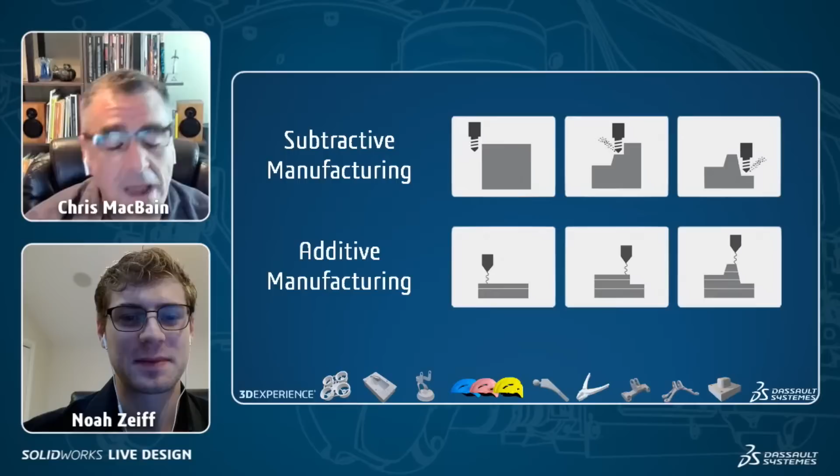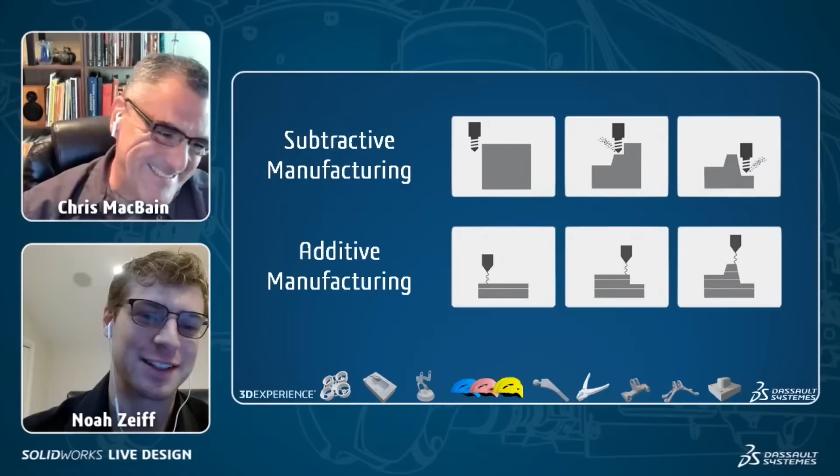I think one of the reasons, Noah, and you'll agree, we're both really excited to do this is because this topic is so fresh right now and so new that getting this out in the open and starting this conversation is really important, that it's not subtractive or additive, that they really do work together. Right. So for anyone in the chat, sorry, we put the boxing gloves away. This is not a one versus the other. This is very much working together. But awesome. Thanks for painting that picture for us, Chris.

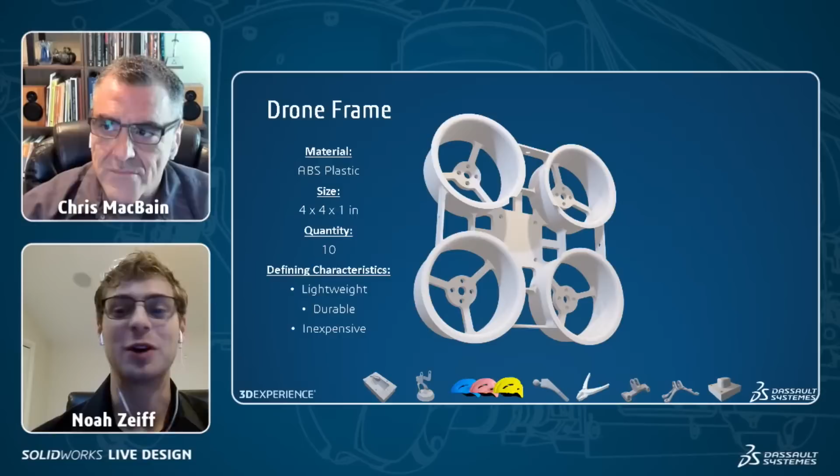So let's jump in. We have our first part, and this is our drone frame. It's made out of ABS plastic, 4 inches by 4 inches length and width, only an inch tall. Customer wants 10 of them, and the defining characteristics are lightweight, durability, and it needs to be inexpensive. So before we jump into it, I just want to preface all the parts we go through today. You can subtractive manufacture the ones we would recommend using additive for, and vice versa. You could injection mold these. You could whittle them with a stick, as one of our producers pointed out. But this is just our recommendations for this specific criteria and the additive and subtractive requirements.

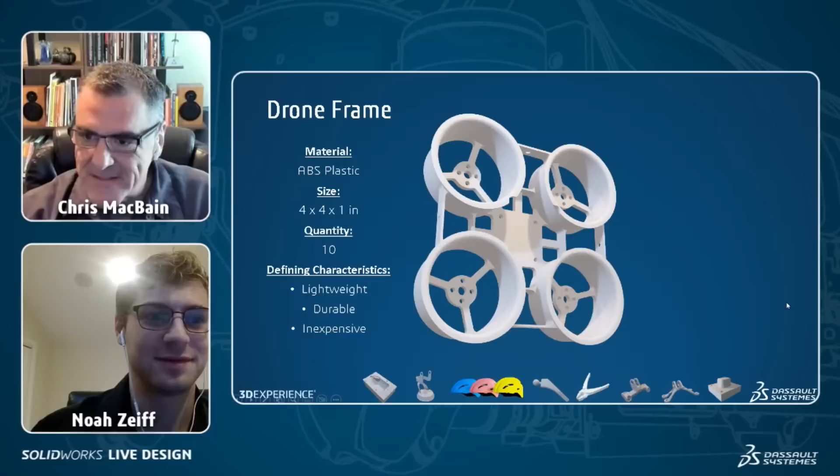So this is a really interesting model also, Noah. Yeah. It looks really simple, but when you look at it a little bit closer, it becomes a lot more complex, and I'm looking forward to seeing how many people go which way on how they make this. Absolutely. And for this one, we're going to go with additive. And there's a couple reasons why you would go additive with this part. Going down the line, when it comes to the material size and quantity, you could go either way. They could be subtractive characteristics.

But if you're looking to reduce weight, additive gives you the unique opportunity to get those hollow infills. And this quality, CNC machines, subtractive manufacturing machines, can't replicate because there's no hole for the drill head to enter an enclosed surface. But beyond that, not only can you make hollow infill, but you could actually control the infill based on your specific needs. So you can make a part completely hollow to reduce as much weight as possible, or you can create specific infill patterns related to, let's say, strength.

So there's also many softwares now that can let you do a gradient infill to change how dense different parts of a component are. So let's say the cylindrical parts of this drone that protect the propeller, let's say they take a beating more so than other parts.

So you can manufacture this with additive manufacturing. So those cylinders have 100% infill, super dense, super strong, and the rest, like these bars or the middle part holding the PCB board, for example, is only maybe 5 or 10% infill. So you're saving weight, and essentially you're saving material and money as well.

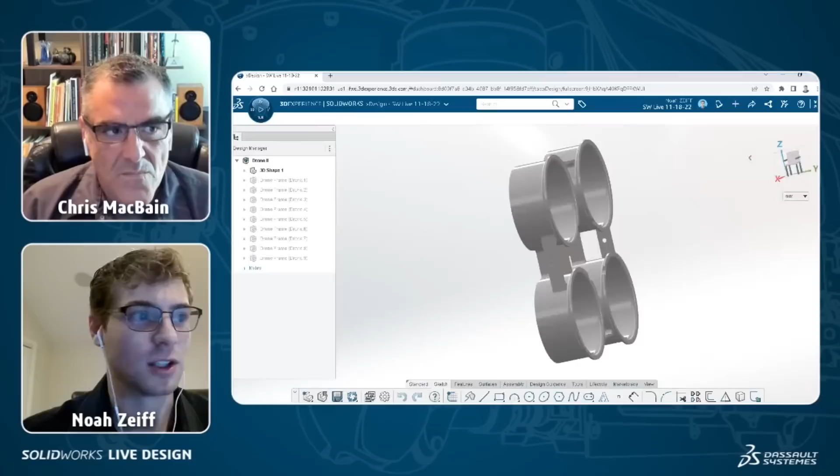And finally, for economic purposes, cost-saving production, additive is a great choice here because if we hop into XDesign quick, I could get our drone up, we could see how if we were to subtractive manufacture this, a traditional CNC machine, and Chris, feel free to chime in, it would only be able to cut down from the top. So this is only the geometry we would have access to if we're cutting.

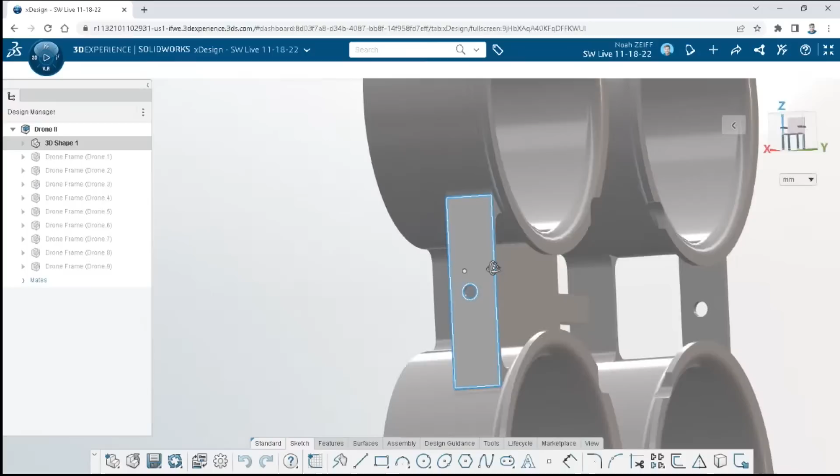But if we look from the side, there's a bunch of geometry here, like the underneath of this bar and this little crevice here that we wouldn't be able to get to if we were cutting straight from the top angle. So this is a great example of how if you were to CNC this, you would either have to use a multi-axis CNC or you'd have to take this part out, flip it over to get the other side. So for those reasons, and let me know if I left anything out there, Chris.

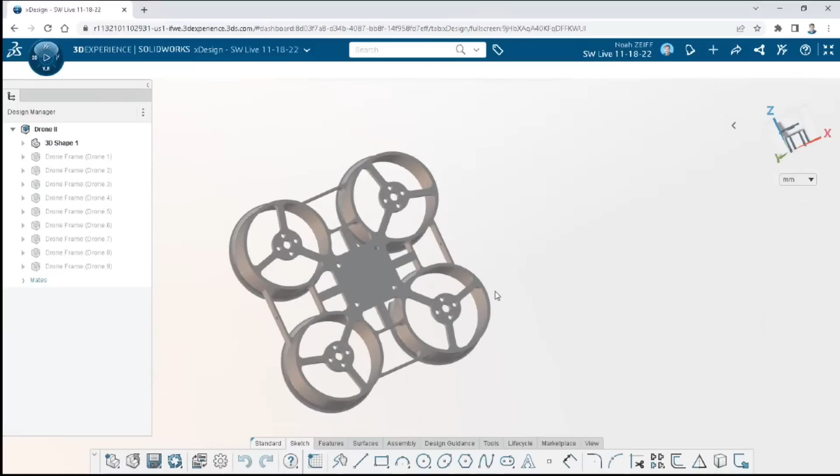Yeah, no, for sure. So I was looking in the chat and somebody was talking about injection molding and things like that. And yeah, you could definitely injection mold this. The amount of slides would be ridiculous, right? Because we had slides on all 4 sides and in the middle. Yeah, for sure. There's undercuts on this part that make it pretty impossible to just subtractive, to make these on a table out of plastic or aluminum or whatever, because of those undercuts.

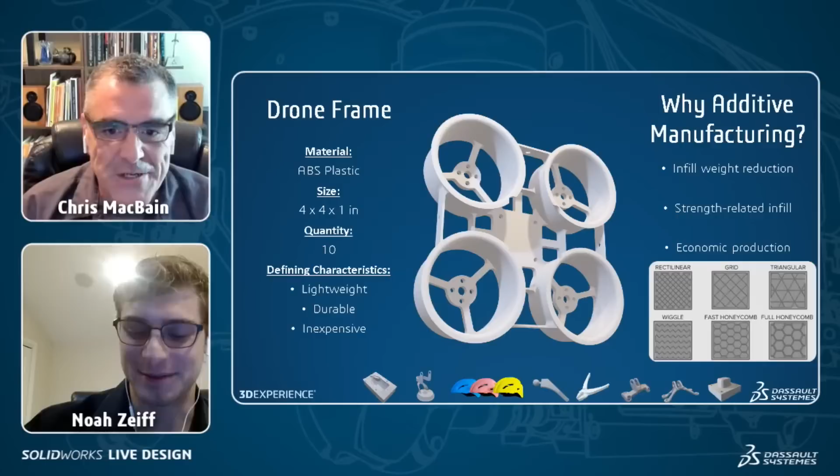I mean, of course, I shouldn't say impossible, right? Anything's possible. I think we've all in the shop made things that people thought were impossible, but this is a great example of additive, Noah, for sure. Thanks. So, yeah, so those are the reasons why we would do additive for this one. On to our next one, though, our blow molds.

Yeah. So this is a tool steel material, pretty large part, 16 by 10 by 6 inches. Customer only wants one of them. And defining characteristics are a smooth mold surface and wear resistance. So let us know in the chat, what are you thinking for this, additive or subtractive? Yeah, just throw it in the chat really quick and we'll see.

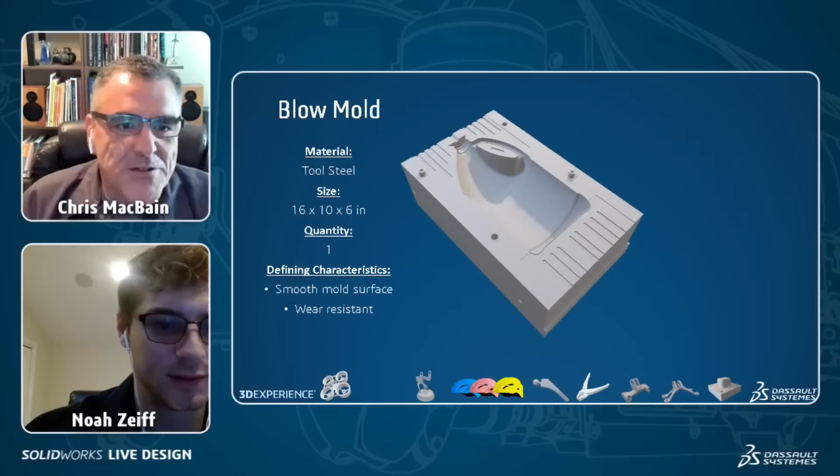But these blow molds are great. This is actually, this kind of mold is something that I used to use for demos, CAD and CAM demos, like way back in the day. And everybody was all impressed with the bottle mold and the blow mold. It was really fun to bring it back and talk about 3D printing it or machining it.

It was great. Awesome. So let's go ahead and reveal the answer here. You got it. It is subtractive. Chris, can you tell us about this one? Yeah, so this one might seem obvious because it's like a big block, right? But more and more, as Noah was saying, with the inside structure and the fill options for 3D printing, you could definitely do a mold core out of this.

Now, for this one, just because of the size, you're looking at 16 by 10 by 6. That would really stretch the build volume of a metal 3D printer. Yeah. And that being said, doing this in 2 parts would probably be disastrous. Also, there's another big thing, surface finish. You're probably going to have to machine the cavity of this to get that shiny surface finish. If you did print this, you'd have to do it post.

Although we only need one of these, which would really kind of lend itself to 3D printing. Because of the use, because of the forces on this, definitely subtractive for sure. Awesome. Yeah, and thanks to those in the chat who said subtractive. Kudos to you.

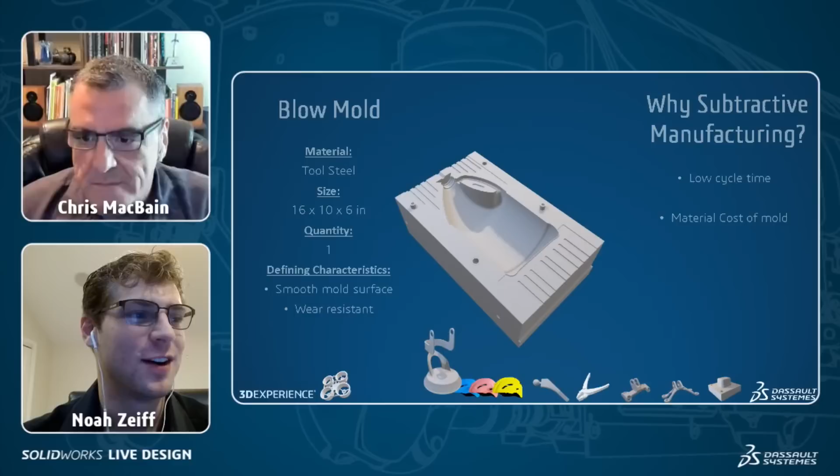Our next part, we got a microphone stand. Chris, can you tell us about this one? Yeah, so this is great. This is actually my microphone stand that I'm using right now. It's actually kind of a mix of stainless steel and tool steel on the back. The customer called, they said they want 500 of these. It's a prototype run, right? So here's the big things, right?

It has to have a heavy base because it needs to hold it, and it needs to be sturdy but lightweight, right? That bracket. So what do you guys think? So it's got to be heavy, right? It's got to be sturdy, and we need 500 of them. Yeah, and this is a good one. I think you can definitely additively manufacture this. You can definitely subtractively manufacture this. Yeah. It could go either way. So the defining characteristics here really play a part in which way we would recommend.

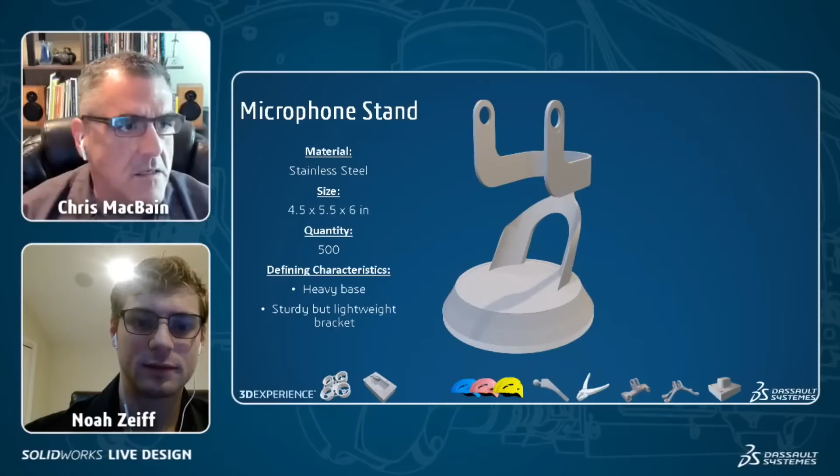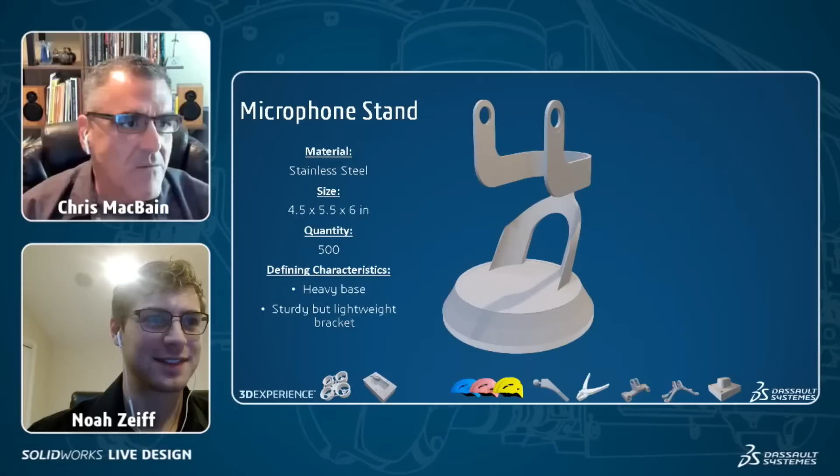Right. So one of the things we talk about is subtractive versus additive. But I think in the subtractive realm, we could also talk about castings. Yeah. Right, because at some point we have to machine that cast. Although there you go, Noah. There's another great live episode using 3D printing for castings. But for right now, just talking about this one, casting at least the top part and attaching the bottom might be a good way to do it. Let's reveal how we do it. There we go. And this is a subtractive one.

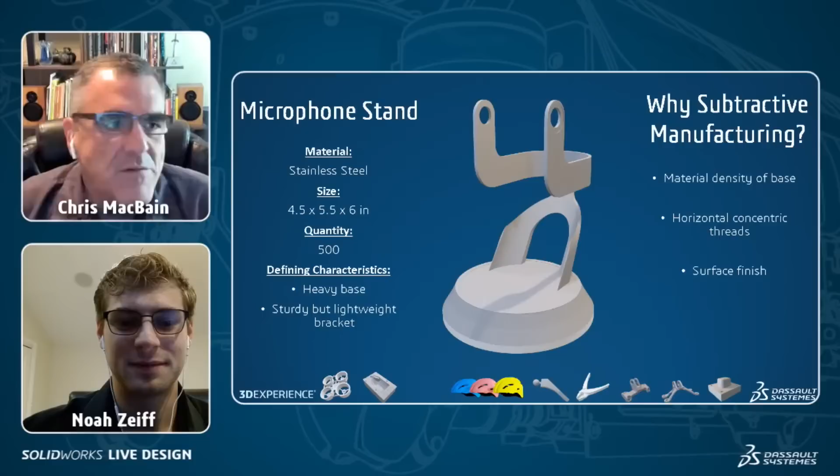So the big thing here, guys and ladies, is the heavy base, right? That's the problem. So if we could add stuff to the base, but we're talking 500 of them. So if we were to print them hollow and fill them, say, with lead shot or sand or something, first of all, what a mess. Second of all, it's expensive, right? You're talking about materials to put in there, people that do it, things like that. When you add all of that for a 3D print, it really makes sense to make these individually using subtractive. Without a doubt.

And again, the brace, now that I look at that, would probably be cast and then attached for sure. Yeah. And even if you printed that heavy base with 100% infill at the bottom, I don't think it would be heavy enough to handle a Yeti microphone or something of that nature. So definitely subtractive for this one. Yeah, for sure. All right, let's move on to our next one.

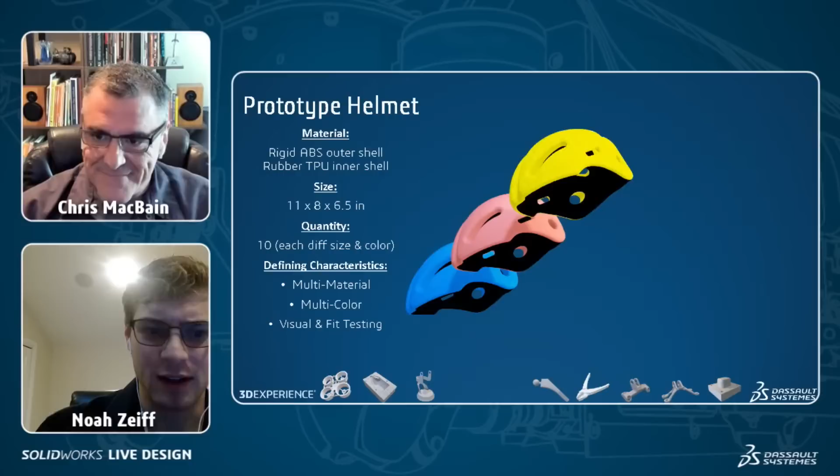We have our prototype helmet. This is a multi-material part. It's got a rigid ABS outer shell with a rubber TPU inner shell. It's around 11 by 8 by 6.5 inches. The quantity is 10, but the customer wants different sizes and colors. And defining characteristics are multi-material, multicolor, and they want to use this for visual and fit testing. So let us know quickly in the chat if you're thinking additive or subtractive. And we'll reveal the answer here in a sec. Drum roll, please.

We got additive manufacturing. And this is an important one because it points out a really important defining characteristic that makes additive different from subtractive. In subtractive manufacturing, you have your block of material that you're cutting away from, and it's usually a singular color or material. Whereas in additive, you have the ability to deposit colors and materials in specific areas. So this is commonly used to differentiate support material from model material, where you could break away supports for overhanging angles. But you could also use this to differentiate different parts of the same model, where we can print a flexible inner shell and a rigid outer shell.

Some additive technologies even take this further, and instead of just using separate nozzles to deposit separate materials, they can mix those materials and colors as well. So you could get qualities of both materials in one. So this can be done to mix yellow and blue to create green, as you see in this example, but you could also mix flexible and rigid materials to get a material with different degrees of hardness, which is something really interesting that's being researched now.

And finally, this capability would be great for this case economically, because if the customer is interested in running several tests for visual fit testing, they need to make a lot of iterations. It's likely they're going to need variations, different colors, different sizes. And with subtractive, you'd have to buy each of those materials and colors to cut your part, whereas in additive, you can mix those base colors and materials until you find a winning combination and a winning prototype. So you could stick with the materials you have and mix and match them till you get what you want, as opposed to buying exactly what you need. Yeah, you're absolutely right. Those points you brought up are great, especially when we talk about iterative design cycles.

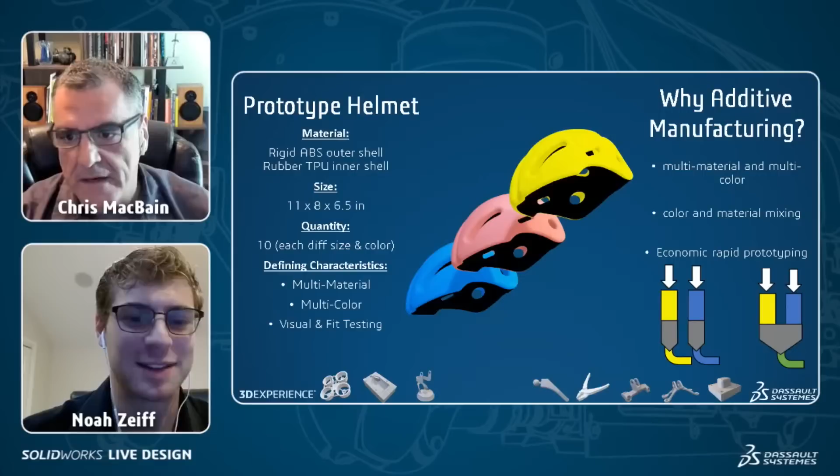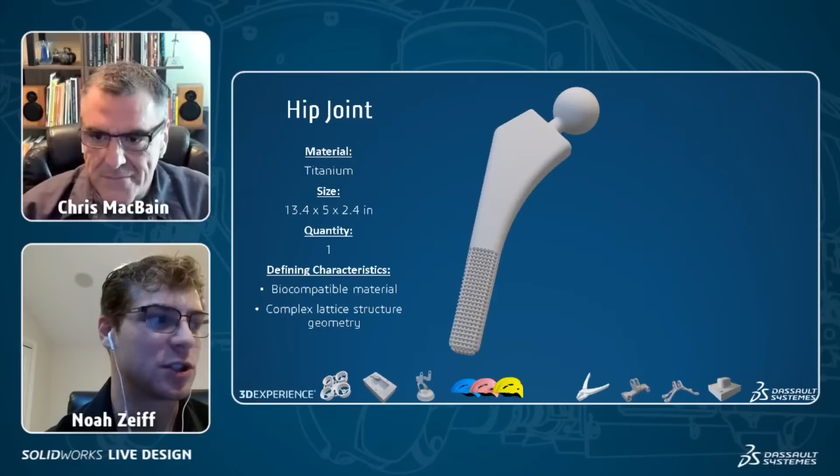So this is an interesting one. This is a hip joint. Material is titanium. Size is over a foot in length, 5 inches wide, 2.5 inches thick. The customer only wants one of them, and defining characteristics are biocompatible material and a complex lattice structure geometry. So quickly let us know in the chat, additive or subtractive, and we'll reveal the answer in a second.

I have to say, this is my favorite one, Chris. Yeah, this one's pretty awesome. This is a really interesting one. Yeah. So, this one's interesting. Everybody, when Noah and I were getting ready for this, believe it or not, we practice, right? This isn't just the first time we've done this, but we were talking about how these used to be made. Yeah. And it's crazy. Noah's going to explain it, and then we'll go in a little bit about why additive is above and beyond the reason for this. So yeah, go for it.

Yeah, like you said, this is a really interesting one because traditionally, this is additive, by the way, and it's because of really that lattice structure. But typically, these hip replacements were made with subtractive manufacturing. And what it really comes down to, why this is now becoming an additively manufactured part, is that lattice structure, where you have this complex overlapping geometry that drill heads or milling heads just can't get into.

And to give you a stat, traditionally manufactured hip replacements are still widely used, still created and used today, but a study did show that 20% had to be replaced within 25 years of those traditionally made hips. So additive manufacturing is really there to decrease those chances of having to replace or redo a serious surgery like a hip replacement. Yeah, and this is all because, I'm sorry, go ahead. Because that lattice structure, the bone is actually able to go in and grow into that and through that. Sorry to interrupt, it's just a really cool model. That's one of the reasons they need to be replaced.

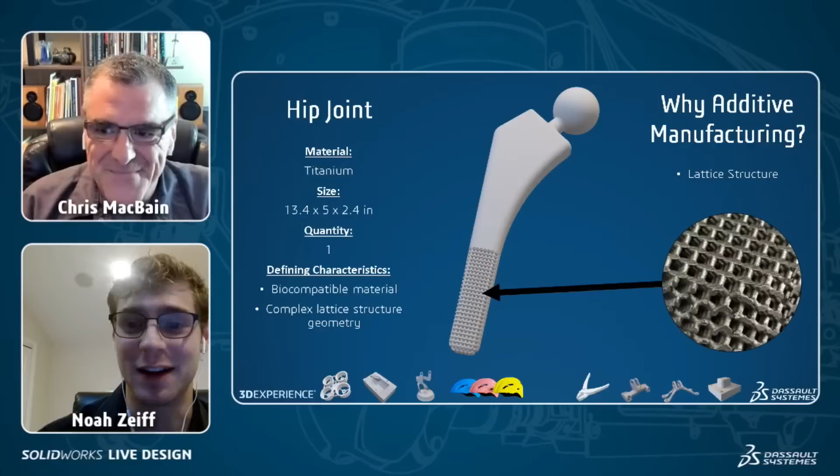Yeah, you beat me to the punch. Sorry. No, you're perfect. Osseointegration is what I was going to say. That connection between the bone and the artificial implant. That lattice structure allows for a better bond between those two. So when you put this in, the bone will literally grow around this implant, and it's not going anywhere. But exactly like you said, definitely something exciting where additive is being used in the medical community.

All right, next up we have this hand pliers tool. The material is nylon. Size is 4.5 by 5 by 3/4 inches. Customer wants 200 of them, and defining characteristics are quick turnaround, so fast production, and they need to be durable. So let us know quickly in the chat, what are you thinking, subtractive or additive for this one? And we'll go ahead and...

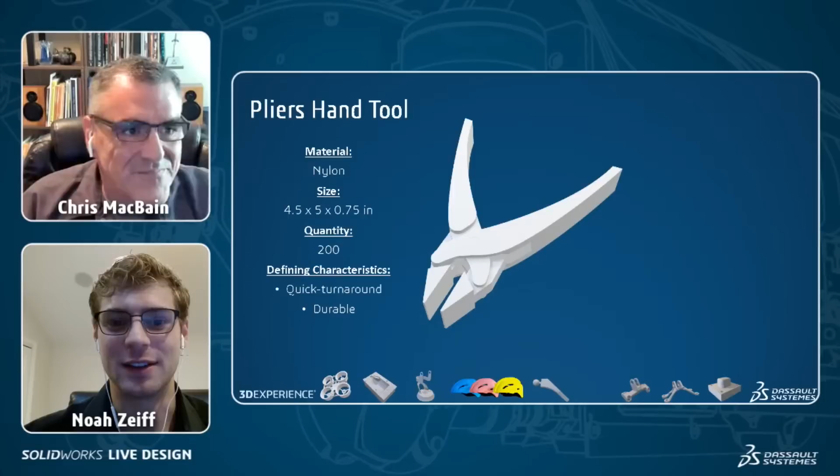Yeah, this one was fun. So this one Noah brought in to the presentation, and the first time I saw it, I thought, okay, that's unfair. It's going to be printing. But the more I thought of it, I was like, I could totally machine that, man. It's only like, what, 1, 2, 3, 4 parts. Yeah. But there's something about it we'll talk about afterwards that I actually thought about last night. Not to throw a curveball at you, but go for it. No, in fact, we'll even make it a little bit easier on the audience. We'll bring up the 3D model in XDesign so they have a good idea of this part, how it moves, and we'll even give them a section view.

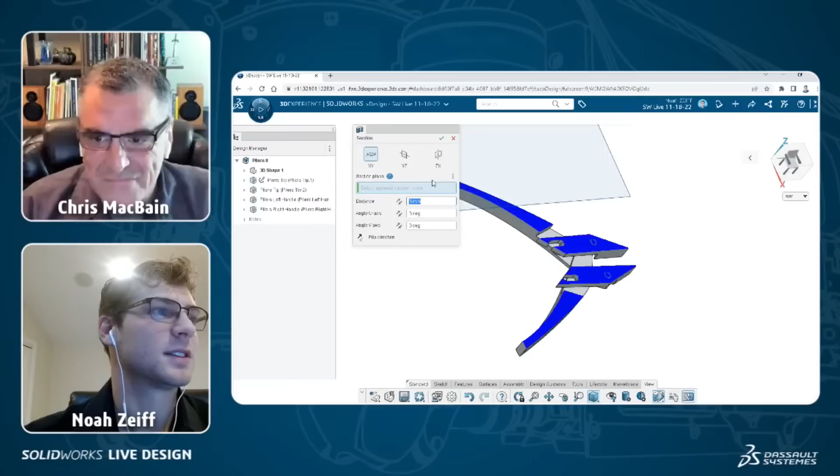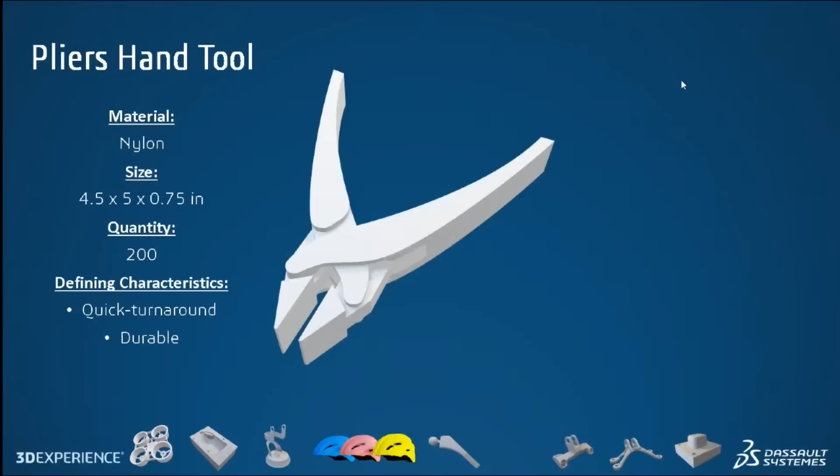Let's see here. So we could go through our part quickly so you can see how the internals work and such. So, jump back to our presentation. Having seen that, we're going to go with additive.

So why is this additive? The main reason is movable assemblies. If we're looking to do a quick turnaround time, fast production, we don't want to have to assemble these pliers together. And Chris is 100% right. You can absolutely subtractively create these parts. Thing is, you're going to have to assemble those parts together once you finish making them. Whereas in additive, you can print support between these parts, and when this part comes out of the bed, you can just blow away that support material, and your part is then free to move.

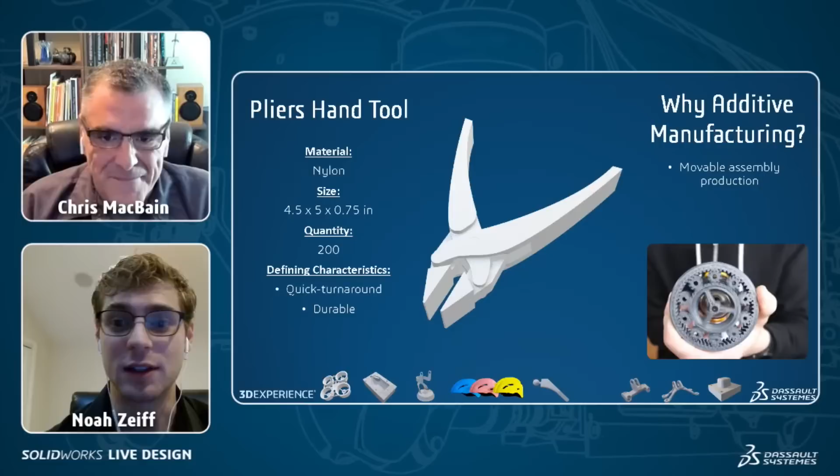Another reason why we would go with additive, especially when you have this moving assembly, is multi-part production. Now, this is a strength that can go with additive or subtractive, producing many parts in a quick time frame. But if you're going with additive, you get to exercise a unique capability, which is Z-stacking, or we call it nesting. Basically, if you're using a powder technology, like in this video here, we're using SLS, or you're using binder jetting, the parts as you make them are suspended in this volume of powder. So they could literally sit on top of each other, and when you remove them, you don't have to worry about compromising any of the parts below them or above them.

So unlike material extrusion, which you may be familiar with, it's like the most popular desktop form of additive manufacturing. In that case, you can only use the entire build volume in the X and Y. It's not advised to print support that you have to break away and then print another model and break away support on top of that, because you're going to get some poor surface finishes on the bottom of your parts. Here, you don't have to worry about breaking away material. You could fill the entire build volume in the X, Y, and Z. Yeah, that's basically absolutely right.

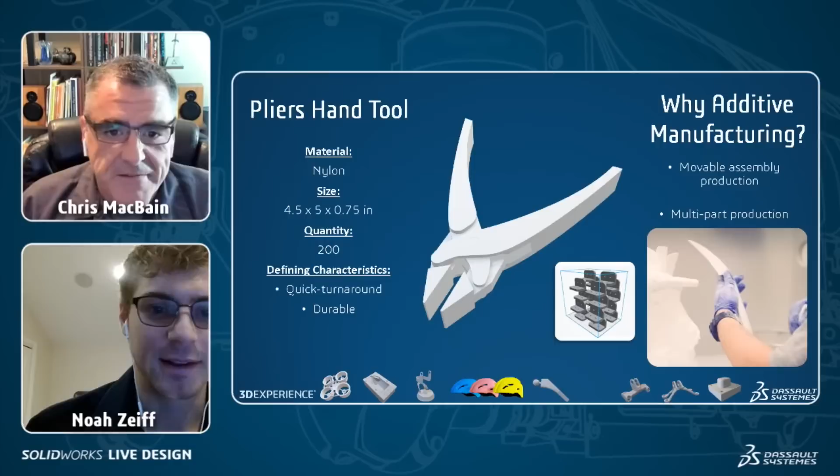You know, I think manufacturing-wise, if I was to break this into those 4 pieces, honestly, the production time, because it's a 2D or 2-axis machine, I may be able to get close to the production time, but it's the assembly that adds to it, right? Because I'd still have to put either pins, drive pins, whatever kind of assembly I end up doing on this. Whereas 3D printing, it's not just the cost of making it or what's easier to make. It's the post processing. What do I need to do to this part afterwards? Does it make sense?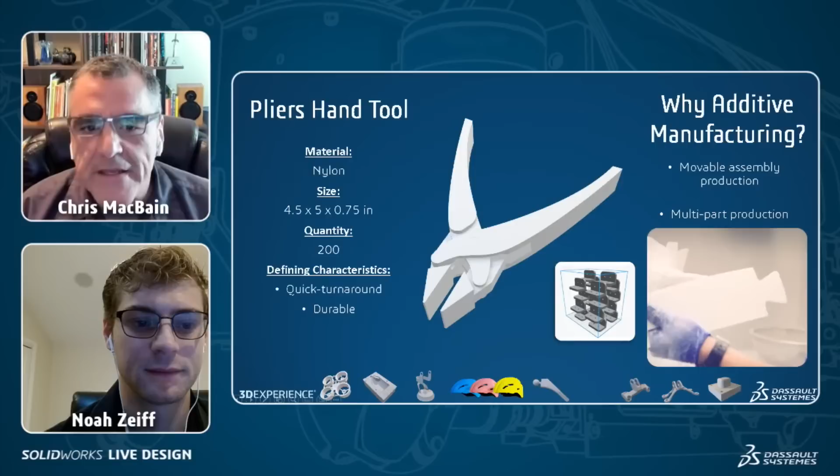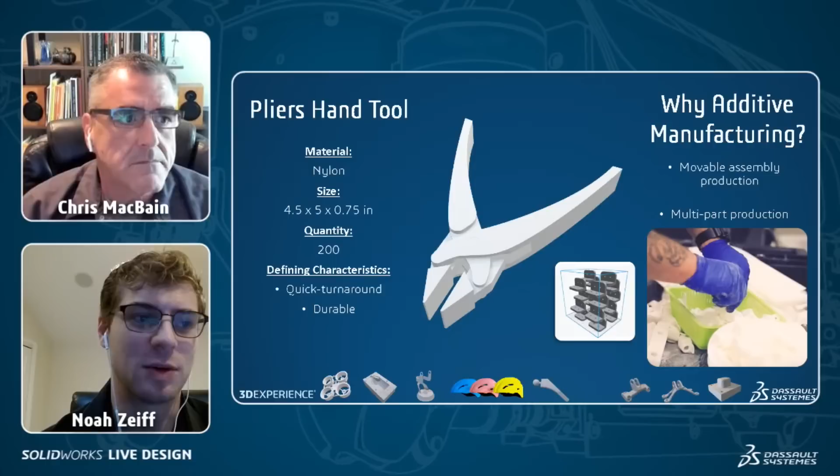And this is a really great example. Again, we're killing it with ideas for new lives, but this is a great example of design for print or design for subtractive, right? So when you get the design for intent, it really starts to get important and really starts to show your time savings and cost savings for sure. Absolutely. Yeah, that's a great point. I definitely have that one on my list. Designed for additive or designed for subtractive. Changing your model so it's easier to produce is a topic we could talk about forever. Forever. Yeah.

But next up, we have this bracket. So this is a bracket made out of aluminum. It may look familiar to some of you in the chat. We'll see. Its size is 6.8 by 4 by 2.5 inches. Customer wants 400 of them, and defining characteristics are lightweight and durable. So let us know. It's starting to get tougher, guys. Subtractive. It is. That's right. It's starting to get tougher. What do you think?

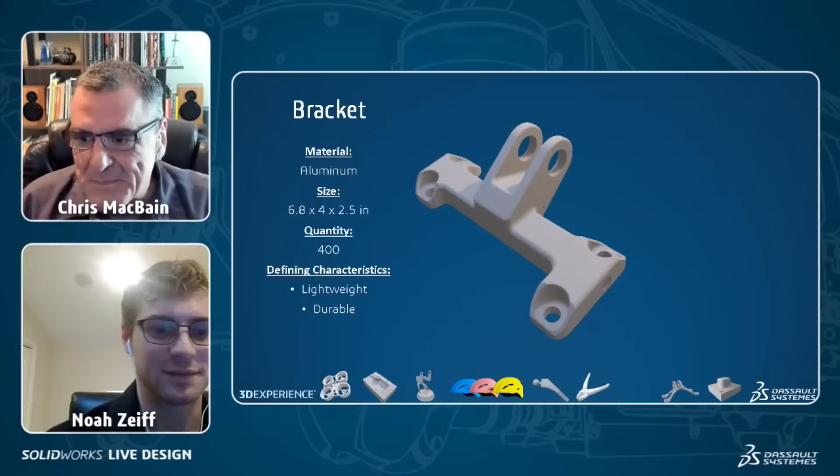So this one was a fun one too that we talked about. As an example, it is pretty basic, but when we look at this for subtractive, it's basically a 2D part, but there is that side op where you have to do that big hole going through. There's a lot of things to consider, stability of the print, things like that. So let's see what everybody comes up with. All right. So I'll go ahead and reveal the answer here. And it's subtractive. Definitely. Chris, can you tell us why?

Yeah, so, you know, it's really basic 2D geometry. If I was going to machine this, depending on the size, so it's 2.5 inches high, I could definitely get a plate, secure it down, machine these all from the top, cut them out, and then do a side op for that side. It'd be a pretty fast thing we can do in multiples. It'd be a fast machine time depending on how many I could fit.

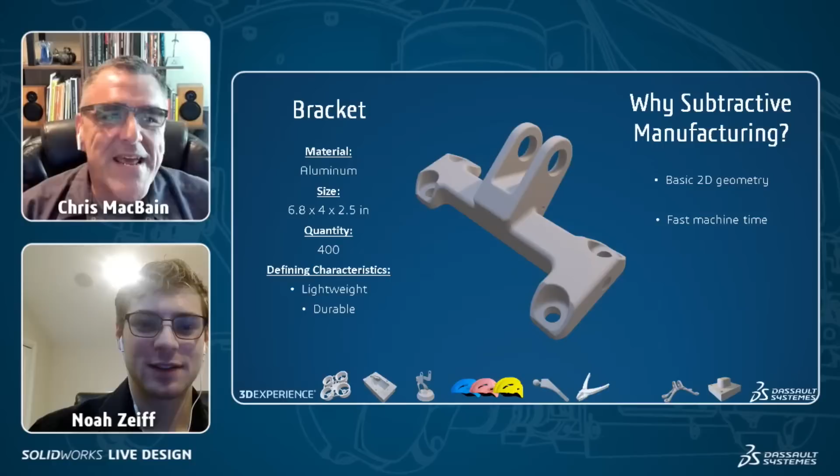Absolutely. Somebody said aluminum, and that's absolutely right. So if this part's made out of aluminum, it'd be really fast and easy to machine. So this one's going to be 2D. Sorry, this one's going to be subtractive. And yeah, we got some great answers in the chat. Machine it. Aluminum, subtractive. Awesome. Thanks, guys. So what would make this not subtractive, Noah?

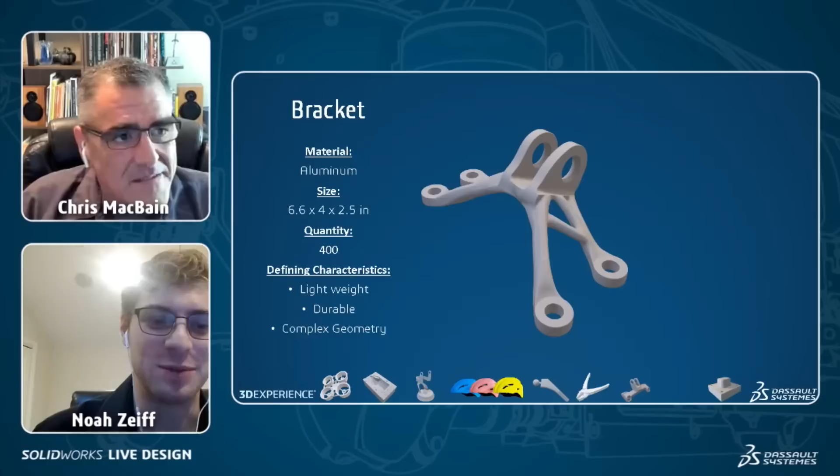Well, I'm glad you asked. So this is the same bracket in a sense. Same material, roughly the same size, same quantity, and the defining characteristics are the same in lightweight and durability, but this time we have a complex geometry. In fact, it's even overlapping in some cases. So I think our audience should be able to guess. We changed this a little bit. So it's not going to be subtractive this time. It's going to be additive manufacturing.

For sure. And weight reduction and free complexity go hand in hand when it comes to why this part would be additively manufactured. And it comes down to the same principle, which is generative design. For those that aren't familiar with it, it's the idea of optimizing a 3D model based on its loads and constraints. So, just like in the last example Chris spoke about, you can see the same 2 vertical holes at the top and the same 4 horizontal holes at the bottom. Those are our constraints, so they cannot be compromised within this model. However, the geometry holding together those holes is obviously very, very different.

And that's because generative design was used to analyze the loads on this part, which way it would be pushed, pulled, twisted, whatever. And it recommended this geometry to maximize strength and reduce weight as much as possible, because those were our constraints. And when you use this principle to create this shape, it'll often dictate your production method. Yes, generative design parts can absolutely be CNC'd. But typically, when you have those organic curves and those tight crevices, they lend themselves to 3D printing, and that's because AM uses the concept of free complexity.

And you can see it in this graph here. It's a really interesting concept that basically explains the more complex your part gets, it doesn't necessarily mean it gets more expensive. Whereas in subtractive, typically the more complex it gets, the more you're going to have to pay, the more machine time you're going to have to use, and so on.

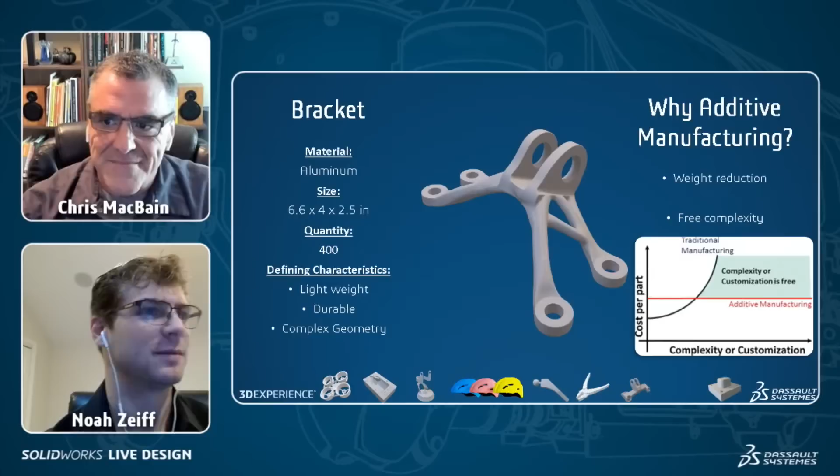And next is onto our injection mold core. So this is another part made out of aluminum. Size is 8.5 by 8 by 4.5 inches. Customer only wants 2 of them. And the defining characteristics are low run injection mold, coolant ports on the side, and smooth mold surface. Now, before you guess on this one, take some time to analyze the part and let us know what you think. Yeah, for sure.

It looks pretty simple to me, Noah. I don't know. So have you ever made a part similar to this? I have actually. I did my apprenticeship in injection mold making, so some of our projects were making mold cores very similar to this. And it took a long time.

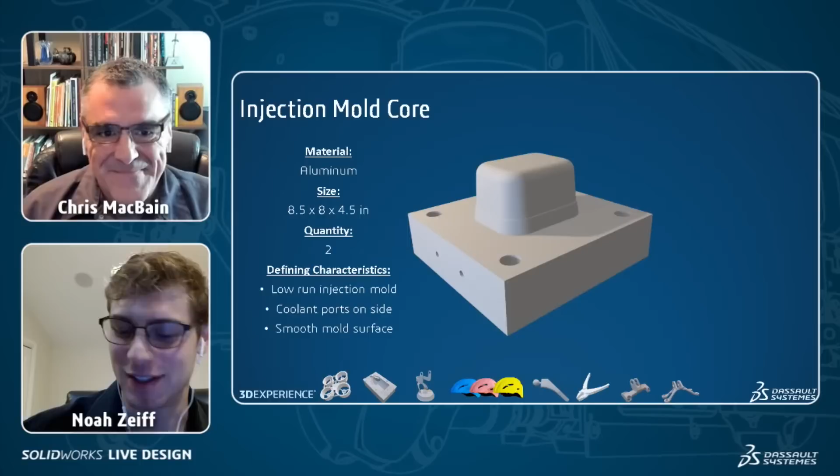Yeah, but we did. I mean, there was definitely a little bit more complex, but yeah, I've definitely made some like this. But yeah. Awesome. All right, well, I'll go ahead and reveal the answer here. It is subtractive. Can you tell us why?

So looking at this right here, right? So we're saying subtractive. Just looking at this, I'd be like, this is great, right? It's a 2-axis. The majority of it is 2x with maybe a little bit of a draft, which I could probably do with an angle cutter. Going around the top, there's a little 3-axis, if I had a rounding over cutter, maybe with an angle.

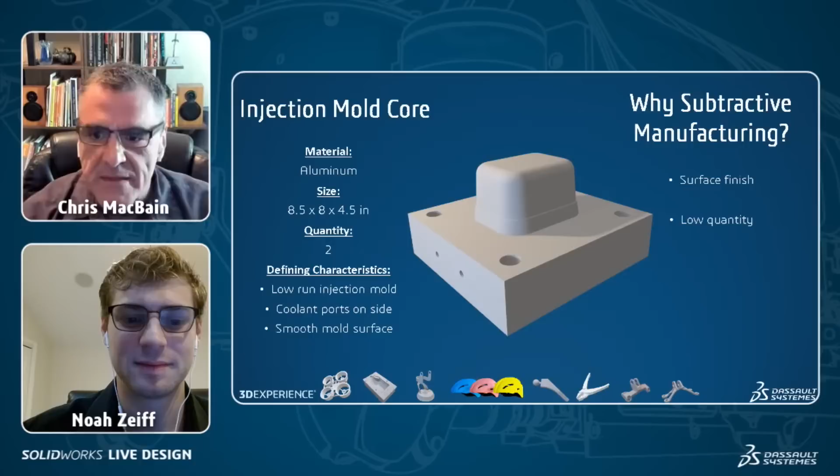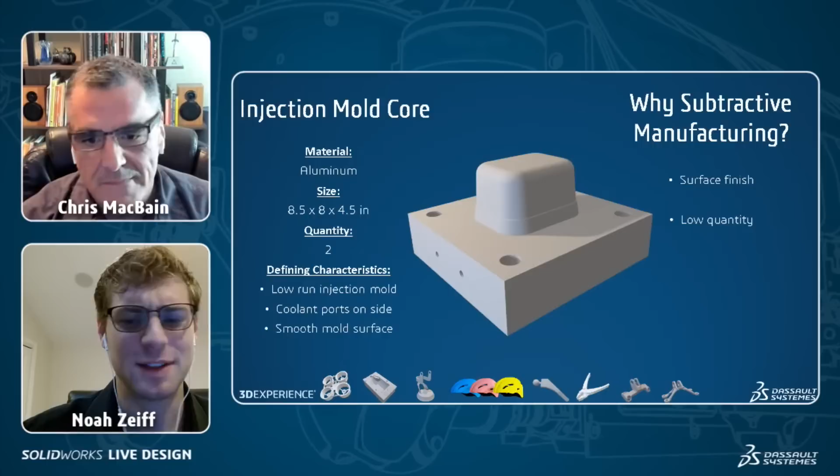Yeah, for sure. I mean, this is just so basic. I would definitely machine this. If I just saw it like this, I would say, yeah, definitely, let's go ahead and machine it. All right, but there may be something more to this part. What? Let's take a look.

So it's got some internal cooling channels, which adds a factor to this that maybe makes it a bit more complicated. Mm-hmm. So can you tell us why? Yeah, so this is something that's really, really becoming popular, injection molding and printing, and it's called conformal cooling. So instead of old school cooling lines just being straight drills that kind of ran into each other, now we're able to print these mold cores with these more complex cooling channels.

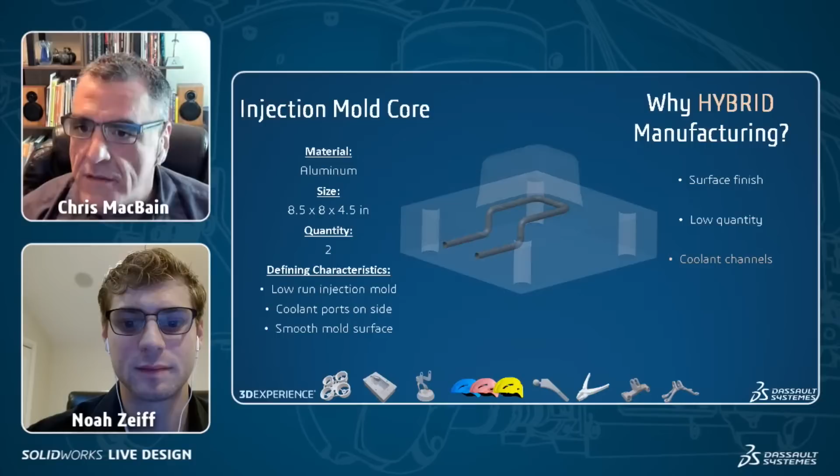Somebody actually, and I want to bring this up just as a side note. So this really brings it into hybrid, which I'll get to in a second. But Noah and I were talking about how cylindrical those channels are going to be when you print it. And somebody in the chat asked, how do you compensate for concentricity or circularity in printing?

There's ways to do it. For sure, there's a couple ways. There's settings on the printers. There's ways to modify your model. Generally speaking, instead of making it a whole circle, you'll make it a little teardrop shape. That's one way I've seen done. But here it doesn't matter, right? Because they're coolant channels. So the actual cross section of those doesn't really make a difference.

So going to why it's hybrid, obviously you need to print it to get those channels in, but we also need that smooth mold finish, right? So we can't just print it. What we'd end up doing is printing it and then doing a post-op on the mill to get that really nice surface finish on it, turn it on its side, do a couple NPT taps for the coolant inlets, and that's it. So this was actually a tricky one. It was actually hybrid, for sure.

Yeah, and I love that we included that coolant because, as you mentioned, that is growing in the manufacturing community. And that teardrop shape you mentioned was something big when I was in school. If you're producing this with a powder technology, let's say SLM or direct metal laser sintering, those top layers of your circle can tend to cave in. With the teardrop shape, they meet at a sharp point and are less likely to cave in. So I thought that was an interesting way they got around those challenges.

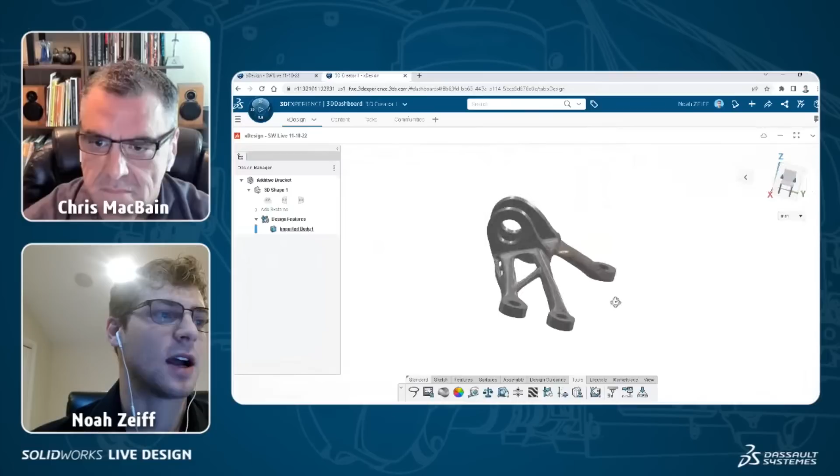So those are the parts we wanted to run through. But we do have a couple extra minutes here, and I'd like to show something I didn't get to before. So let me bring up my window of xDesign. Now this is our generative design bracket, and you can see it has that complex overlapping structure. We would definitely additively manufacture this instead of subtractive because it'd be very difficult for our drill head to get in here. But let's say we want to prepare this for a 3D printing job.

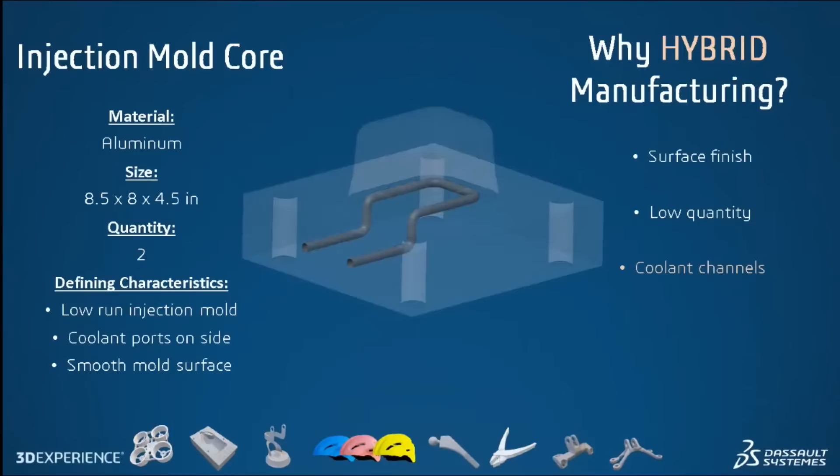Is there anything else, subtractively speaking, that you would add on any of these parts, Chris?

Oh, I think we may have lost your audio. Sorry, I was answering the chat and I didn't want to have everybody hear the tic-tac. So, no, I mean, I think we hit them all.

Bringing that up in xDesign is really great. We've got some really great CAM tools, so keep an eye out for that with Manufacturing Live. And maybe we'll get some in Live Design too, where we can really utilize these models inside of that 3D Experience platform for subtractive manufacturing. Also, Noah and I were talking about the printing setups and stuff in the platform. It's amazing, and it's only getting better. And we're really excited about it for sure.

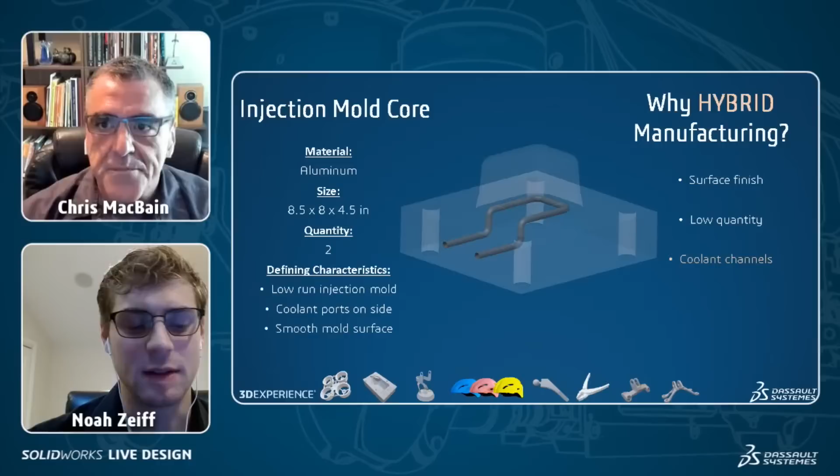Absolutely. One thing I've seen that's really interesting when it comes to manufacturing these parts is we're at a point now where we have machines that can manufacture some of the most complicated geometries, some of the most complicated multi-material parts, but there's not always a software that tells the machine how to print it or how to subtractively manufacture it. So that's some of the problems that we're trying to solve here with our software. And it's something that we're always constantly asking in our heads. All right, we have this beautiful thing, but how do we bring it to life?